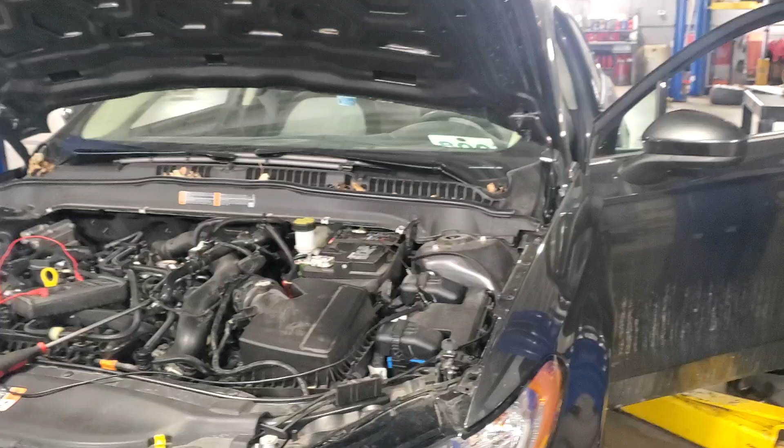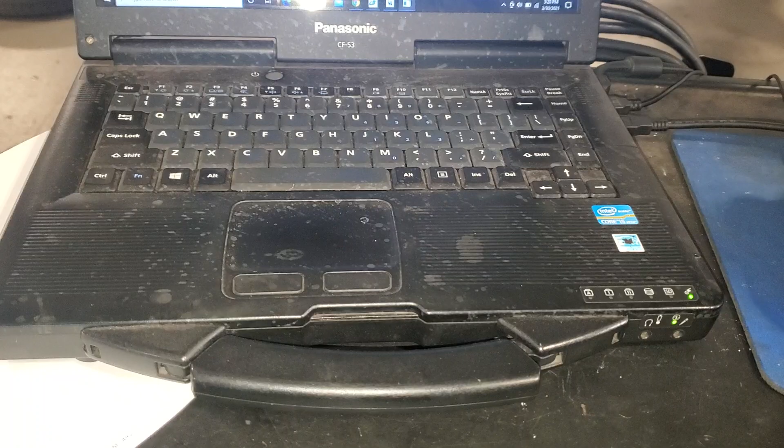So I have a 2019 Ford Fusion with a 1.5 liter EcoBoost engine. This vehicle was in here about 500 miles ago with a P0141 code stored in the computer. That is, by definition, O2 sensor heater circuit bank 1 sensor 2. It's back again, and same code.

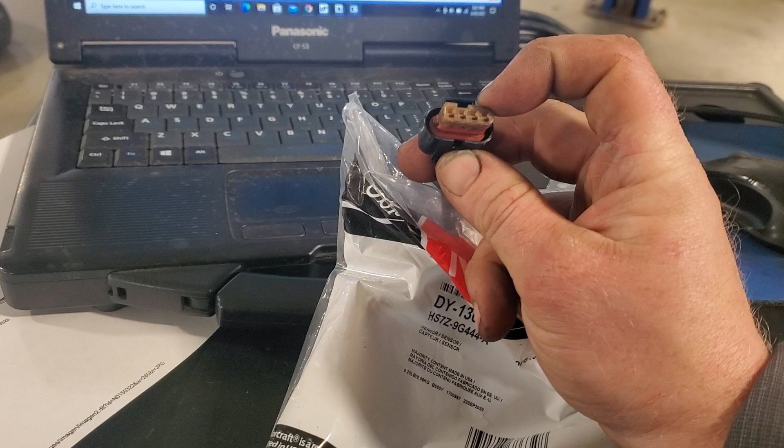Now I've already pulled the downstream O2 sensor from parts, HS7Z 9G444A, and I tested this circuit, pins 3 and 4, 4.6 ohms, just like it's supposed to be. The one that I put in there on the component side is already testing bad. It's OL. So now I want to go through the pinpoint test and re-verify everything again.

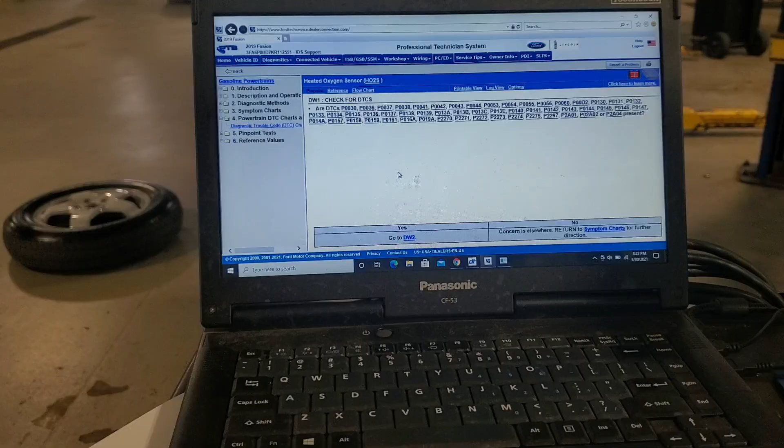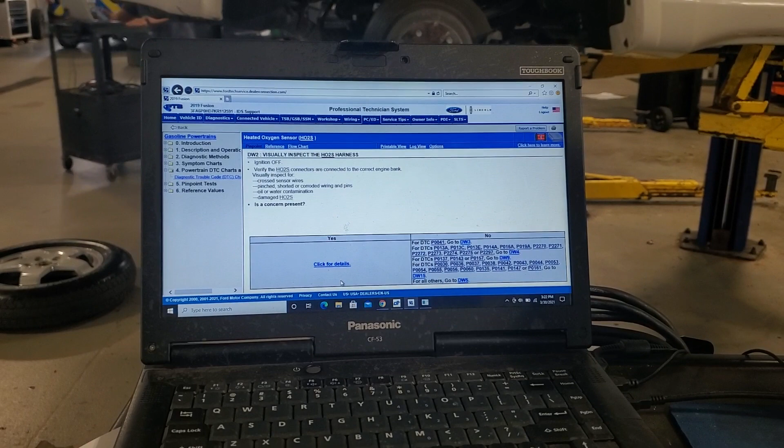So DW1, pinpoint test DW. DW1 says, are these codes present? 141 is right here. So yes, go to DW2. Ignition off, verify the HO2S connectors are connected to the correct engine bank. They are. Visually inspect for crossed wires, pinched, oil or water, damaged O2s. Is a concern present? No. So for no, it says go to DW15.

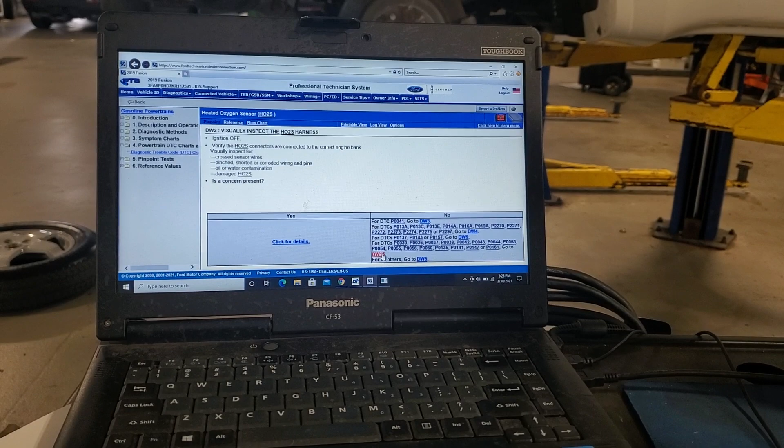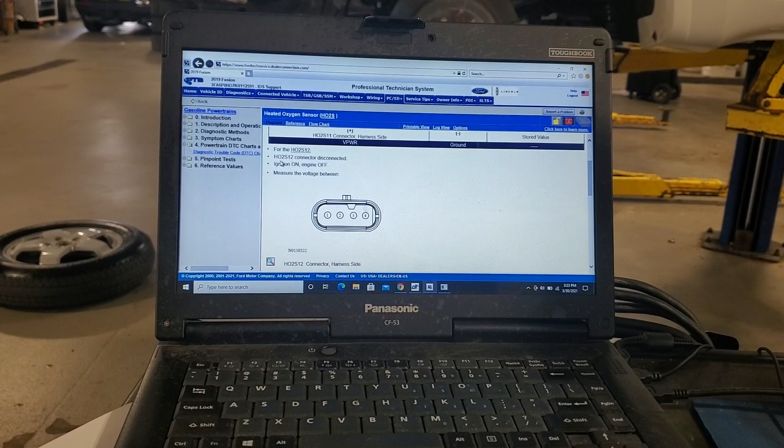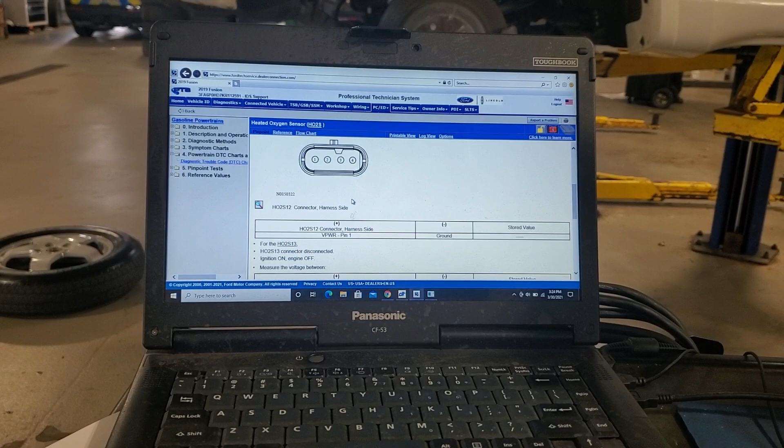DW15. Diagnosis: suspect sensor indicated by the DTC. Ignition off. For the HO2S11, that's not the one we want. For the HO2S12, that's the one we want. Connector disconnected, ignition on, engine off. Measure the voltage between pin 1 and ground. Well, you get battery voltage. I've already done that. Let's go do it real quick.

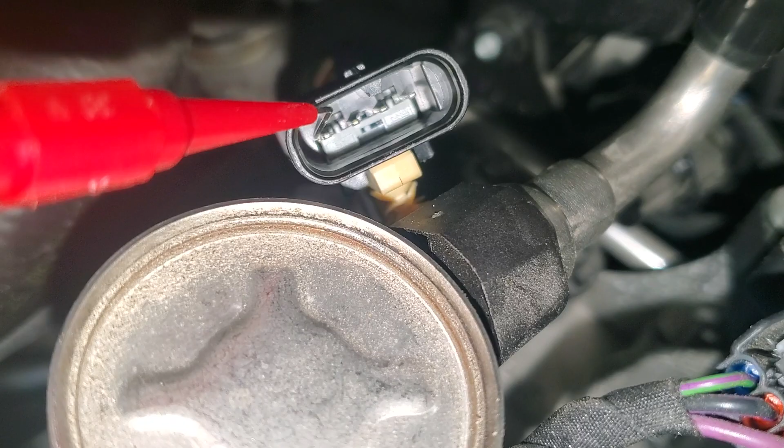Okay, we're on pin 1 and ground. Measuring battery voltage. Okay. Is the voltage greater than 10.5 volts? Yes, go to DW16.

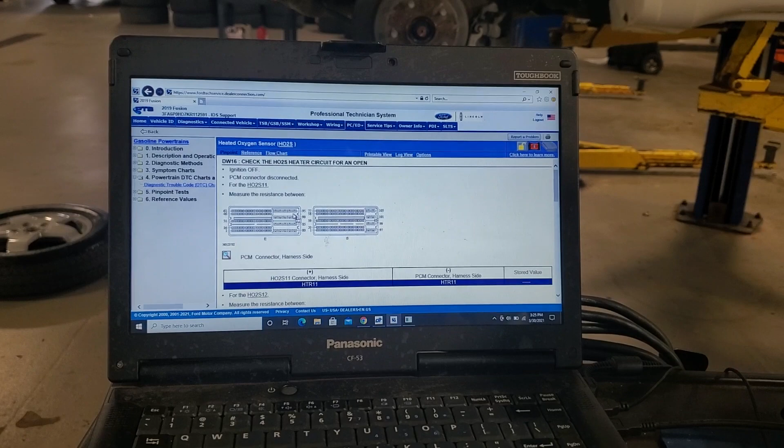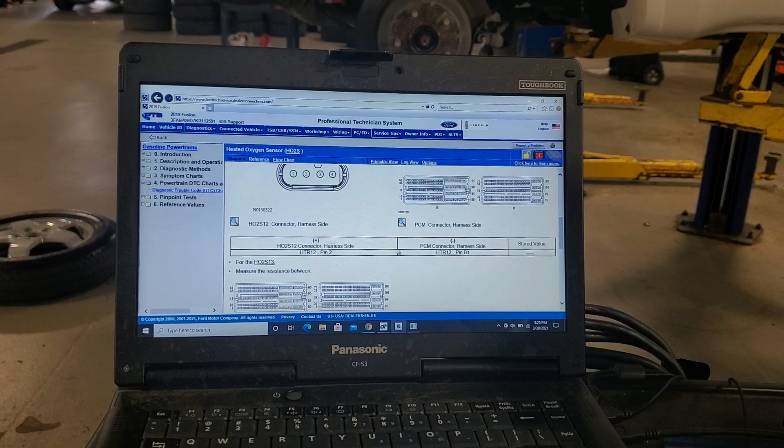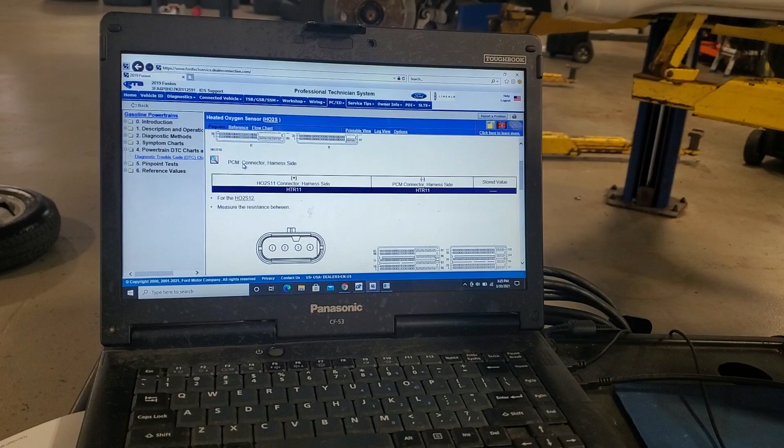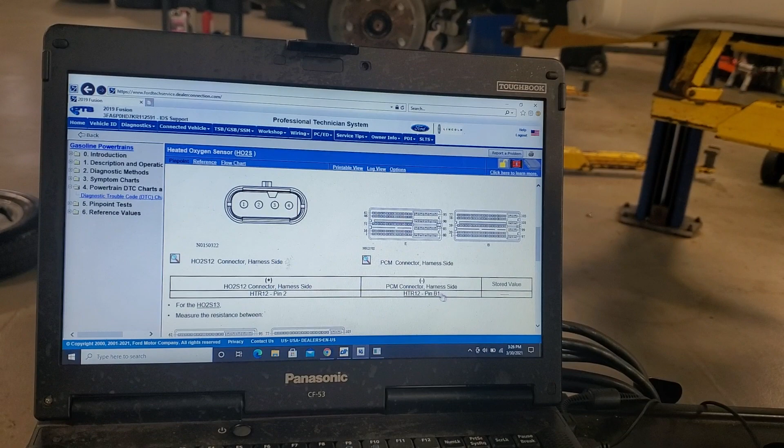DW16. Ignition off, PCM connector disconnected. For the HO2S11, measure the resistance between. We're not interested in that. We want to go from the PCM connector, the heater circuit pin 2. Well, I don't know why you have to do that. Oh, I see what they want now. They want you to go from connector harness side to the PCM. So they want you to go from pin 2 up to the PCM and measure the resistance.

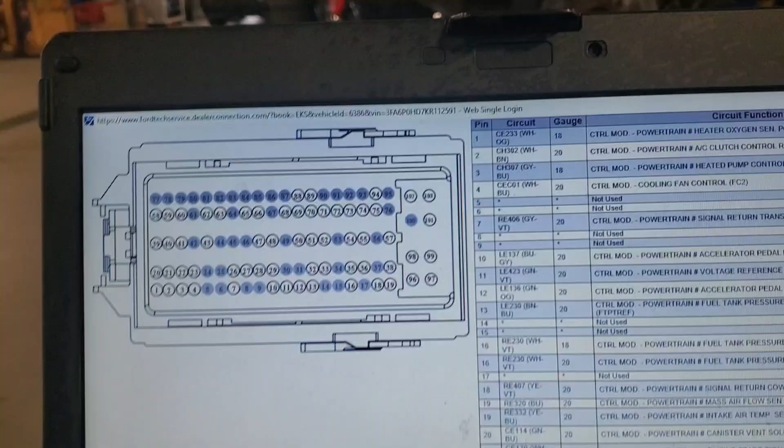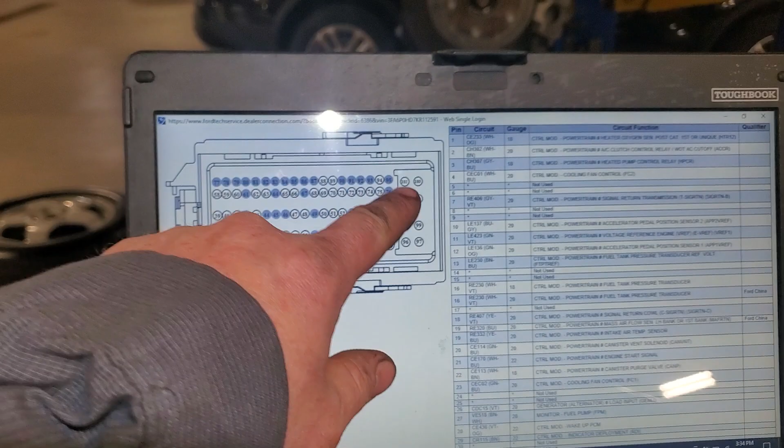So I pull up a wiring diagram and pull up the connector face, and it's saying pin 1 of the 103 pin connector is powertrain heated oxygen sensor post cat, HO2S12. So I'm going to find the 103 pin connector and then check the white orange wire from pin 2 all the way back. I need to find the connector with the 2 banks on this side, and then find pin 1.

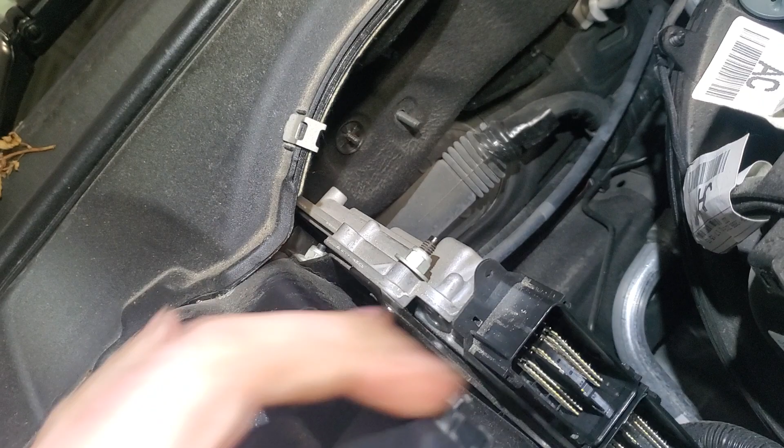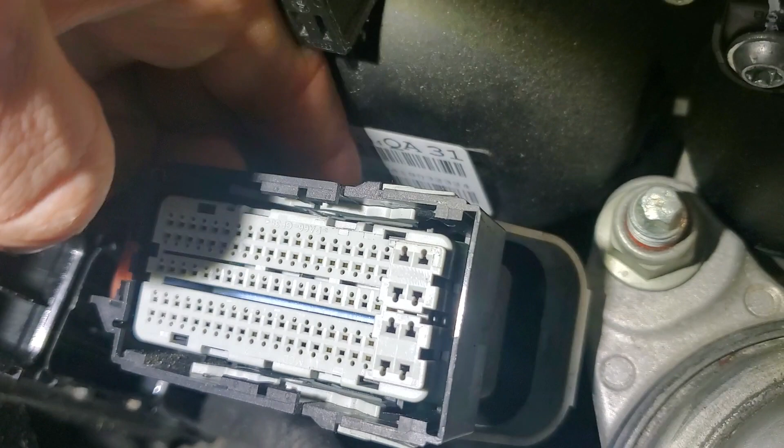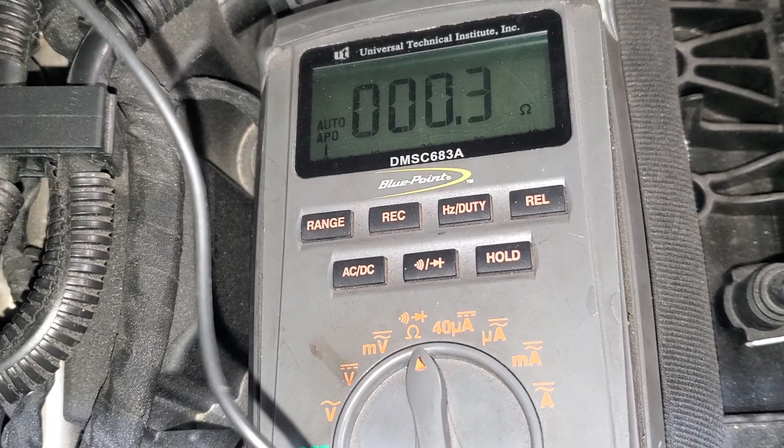So this is the top one, and that's clearly not it. The bottom one is the one. It's this one here. And then pin 1 is this pin right over here in the corner. Let me pin that real quick. Okay, ignition off. I'm in pin 1, and I'm on the number 2 pin. And I've got 0.3 ohms, 0.4 ohms. So that's not going to be my problem. Is the resistance less than 5 ohms? Yes, go to DW17.

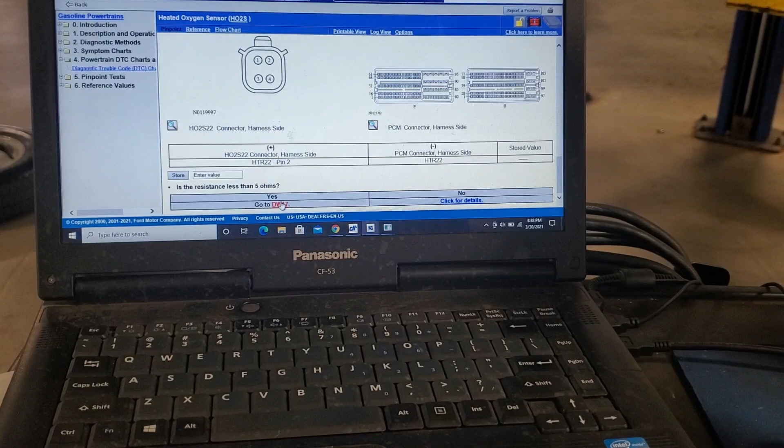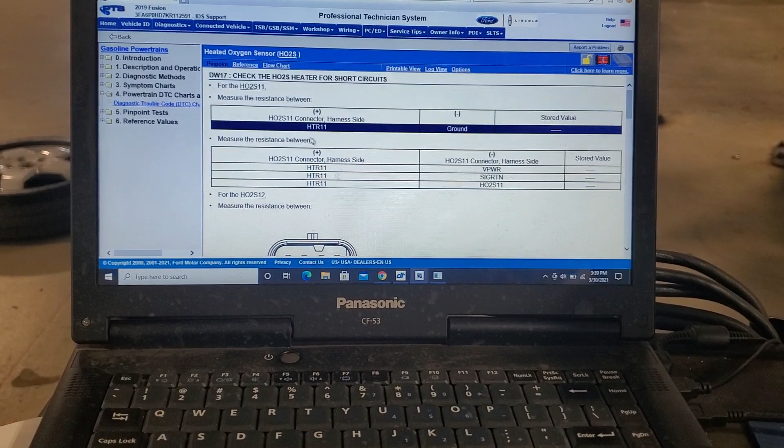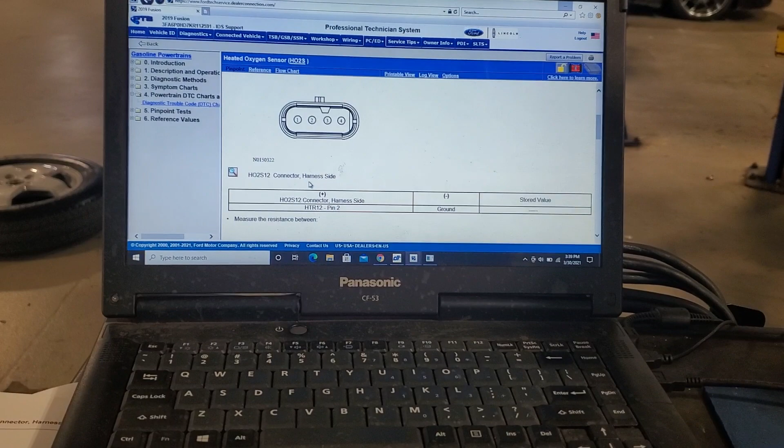So DW17 says check the HO2S heater for short circuits. Measure the resistance between, well that's for heater S11, I want S12. Connector harness side. So they want me to go from pin 2 to ground in the harness. Let's go check it out real quick. Okay, I'm still on pin 2, and I'm on ground. And no connection. So that's good.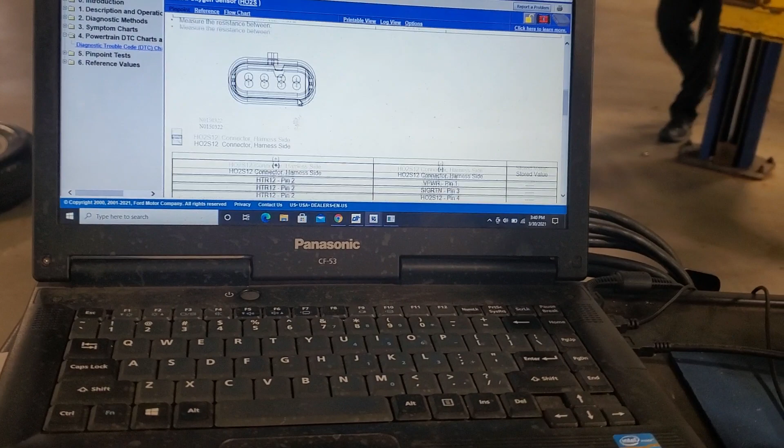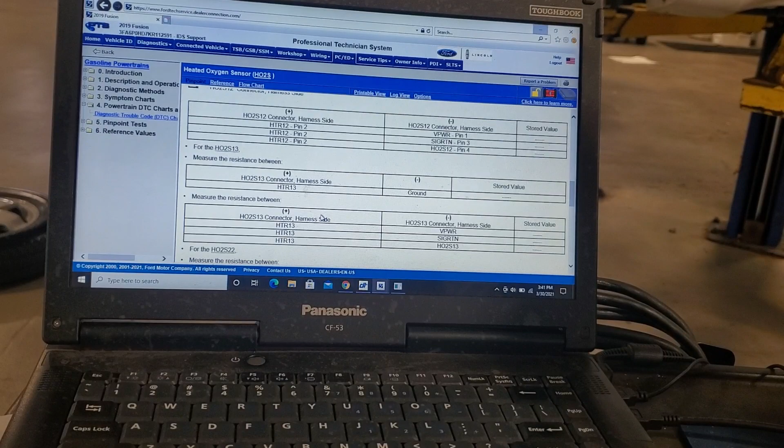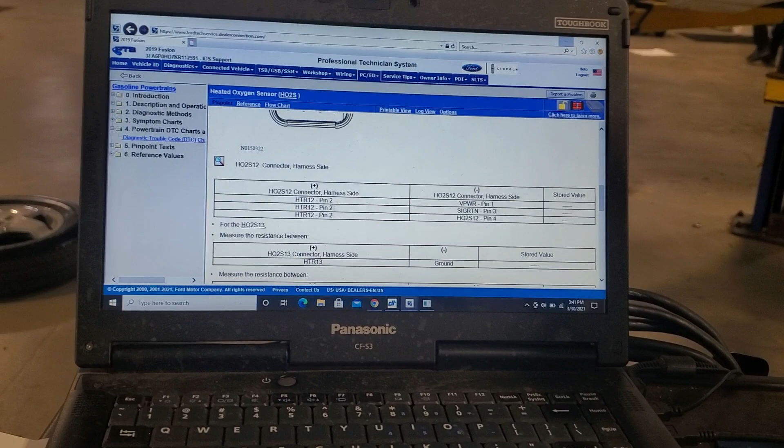So the next step is, are the resistances greater than 10,000 ohms? They're also saying that you can go from pin 2 to 1, 2 to 3, and 2 to 4 inside the connector to make sure there's no connection there. Actually 3 and 4 make connection, but 2 should make no connection with any of them. I'm going to try to do this as carefully as possible because I have to record and do this at the same time, and that becomes a nightmare.

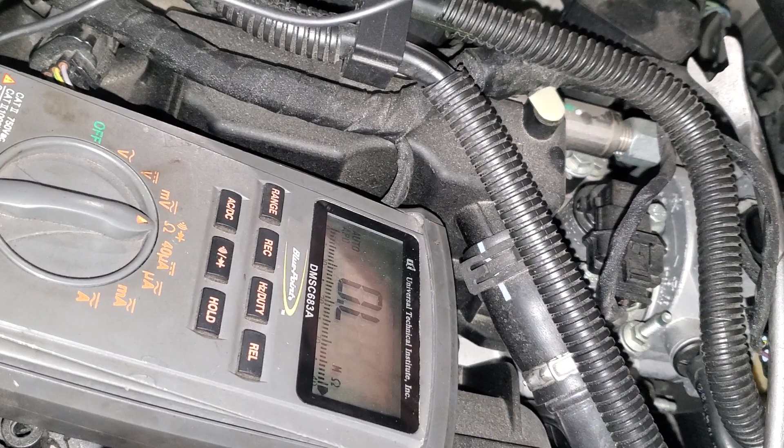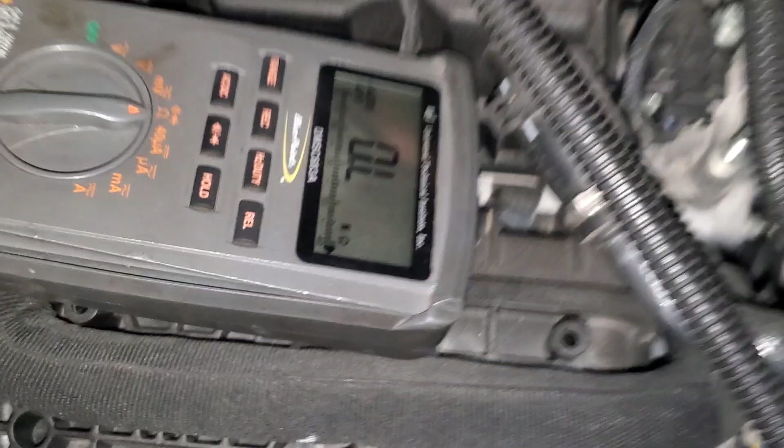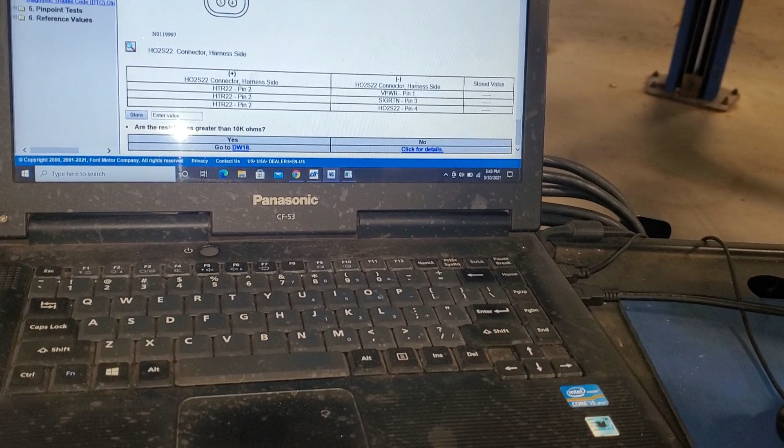I'm on pin 4, nothing. I'm on pin 3, nothing. Now I'm going to go over to pin 1. Nothing. So pin 2 to ground was OL, pin 2 to 1 was OL, 2 to 3 was OL, and 2 to 4 was OL. That tells me there's no connection with the ground circuit. Are the resistances greater than 10,000 ohms? Yes, they are.

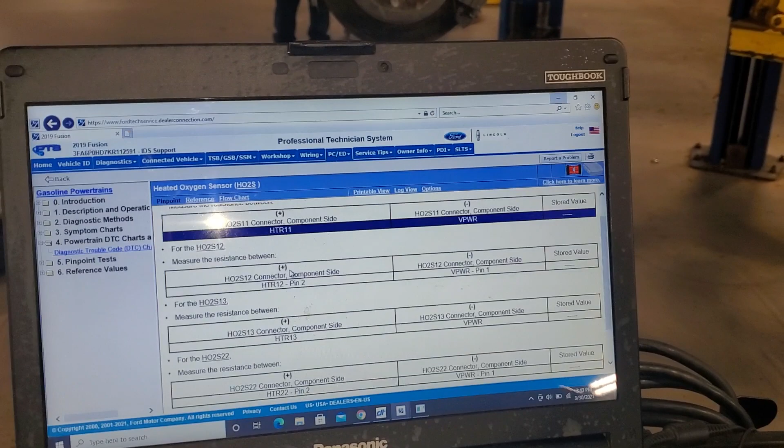Measure the resistance. This is on the connector component side. They want you to measure the resistance between 1 and 2 on the component side. Let me fish my wire out. Pin 1 and 2 is to the left of the divot.

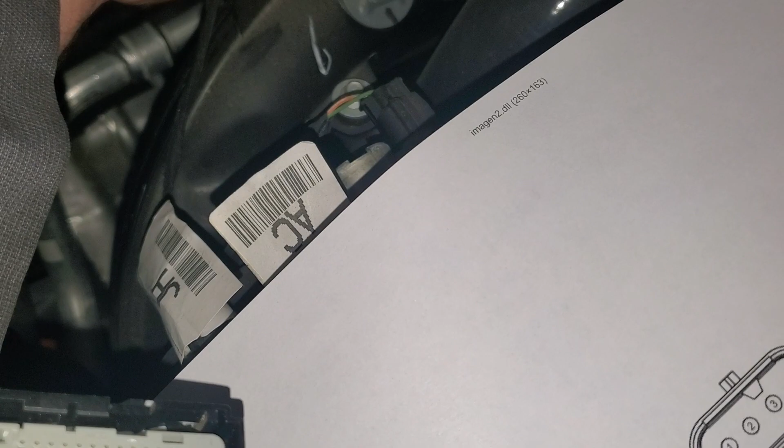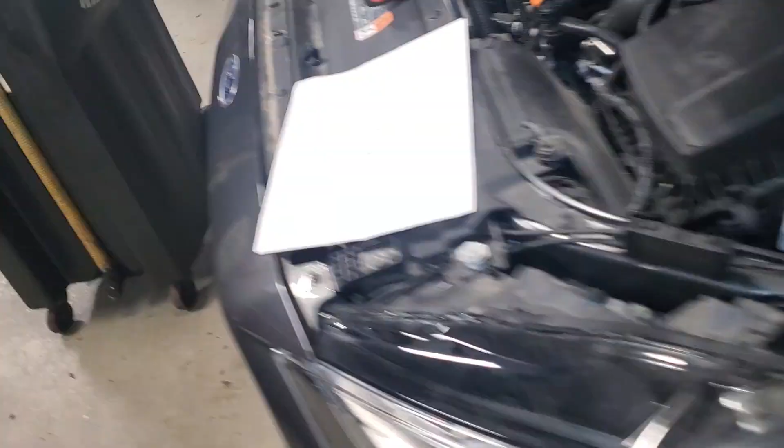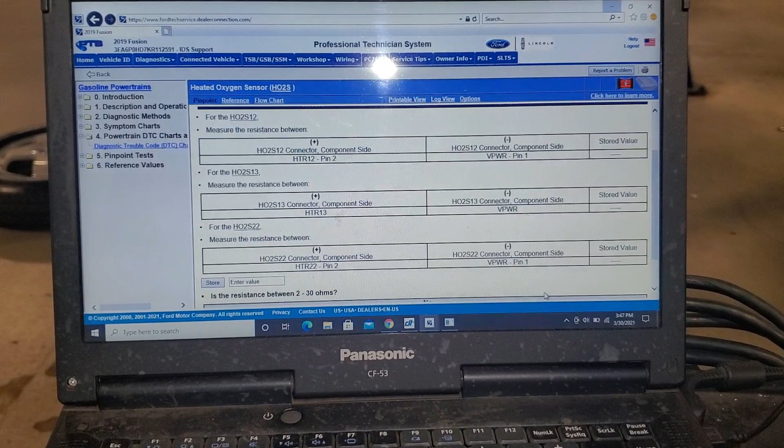Well, I've got OL on everything. There's no connection to anything inside this connector. I'm in pins 1 and 2 right now on the component side, and it's reading OL. I tried 3 to all of them, 2 to all of them on the component side, and I ain't getting anything. It's open the whole way. They're saying you're supposed to have 2 to 30 ohms on pins 1 and 2. Is the resistance between 2 and 30 ohms? No. Install a new HO2S. Reset KAM.

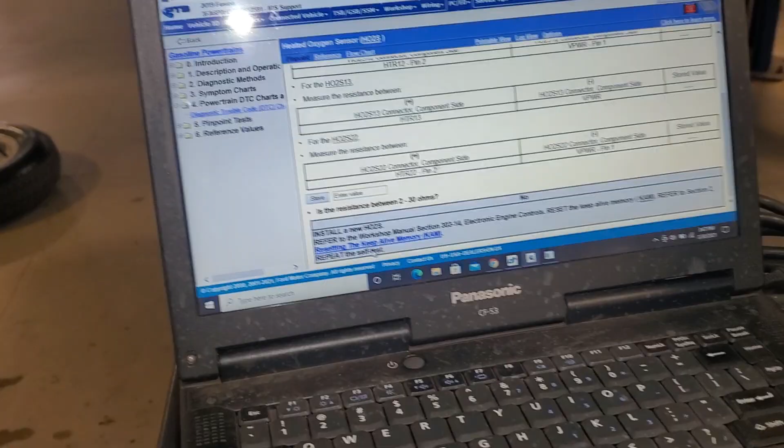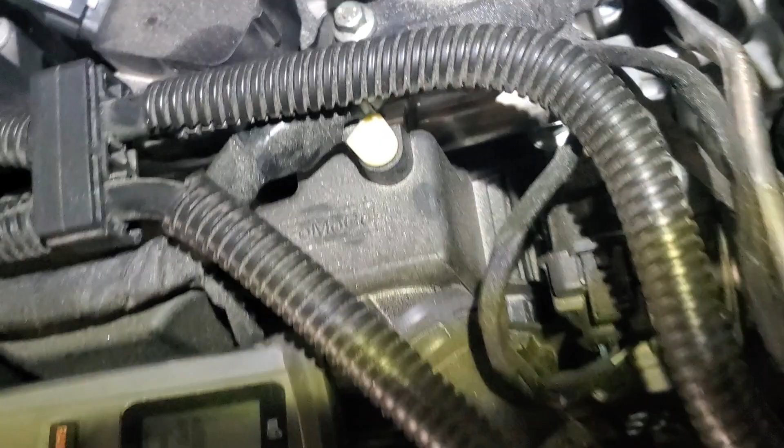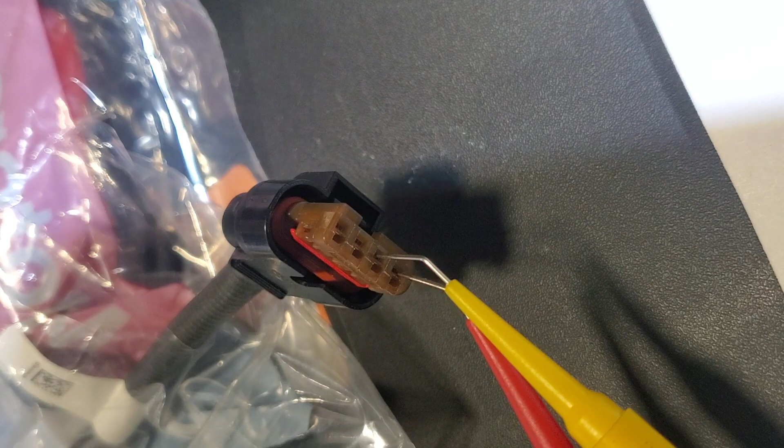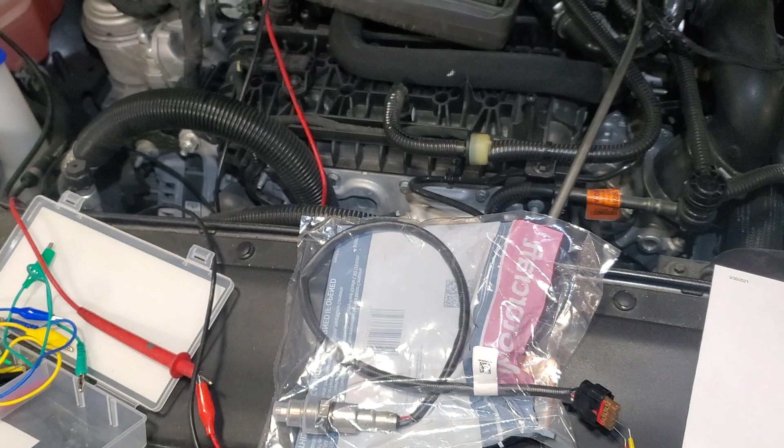Alright, let's compare that to the new one. You see the circuits I'm in right now, and it's reading OL. Let's take those same ones out and put them in this one. So I have my connection here. 3.5 ohms. So I'm gonna have to install a new O2 sensor. Everything else checked out. This is the second install. Let's see what happens.